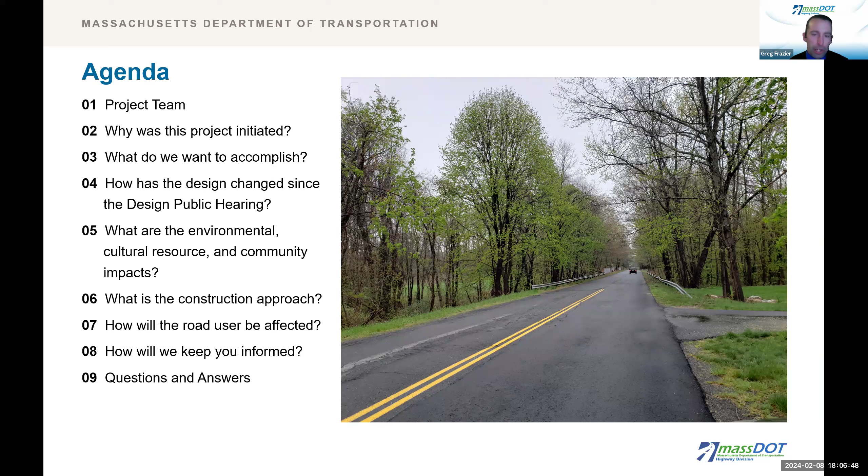Let me welcome our panelists from MassDOT who've joined me this evening. As mentioned previously, I am Greg Frazier, the MassDOT Project Manager. Mark Moore, District 1 Project Development Engineer. Pam Marquis, the Right-of-Way Compliance Manager. Joe Yu and Chris Clem, who will be our producers and facilitators for this evening. From the town of Williamsburg, Nick Kakimoff, the town administrator. And from Hoyle, Tanner and Associates, we have Todd Clark, the consultant's project manager, and Nicole Davis.

A handout has been prepared and posted to the MassDOT website. In the handout, you will find documentation which may be useful to you in understanding the project and submitting formal comments in response to this presentation.

The notice of meeting is included on page 2 of the handout. The notice was sent to your municipality on January 18th, 2024, and coordination will continue as the design progresses. This notice also appeared in the Daily Hampshire Gazette and the Country Journal on January 25th and February 1st of 2024. The meeting was also posted to MassDOT social media. Thank you as well to the town of Williamsburg, Williamsburg Veteran Services, the Food Bank of Western Mass, Registry of Motor Vehicles, and the Pioneer Valley Planning Commission for sharing the notice.

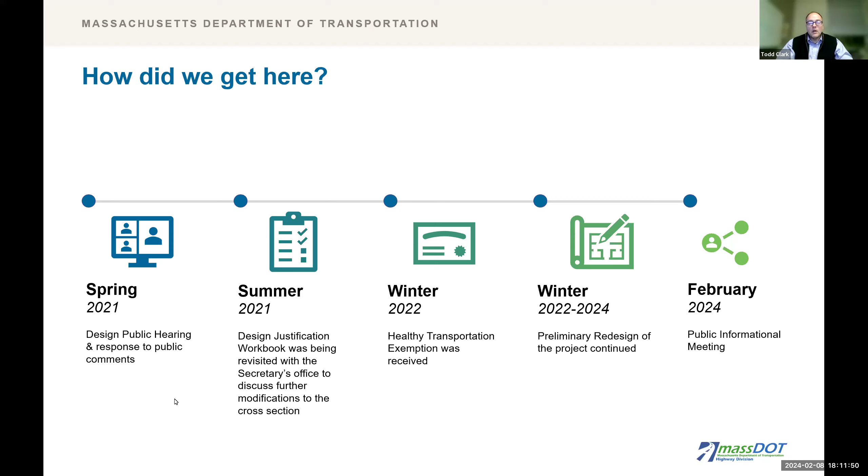Why was this project initiated? To achieve the 4 project goals: 1, maintain the rural character of the road, preserving the area; 2, address the poor roadway pavement condition; 3, update signage, pavement markings, and guardrail; and 4, repair and maintain roadway drainage.

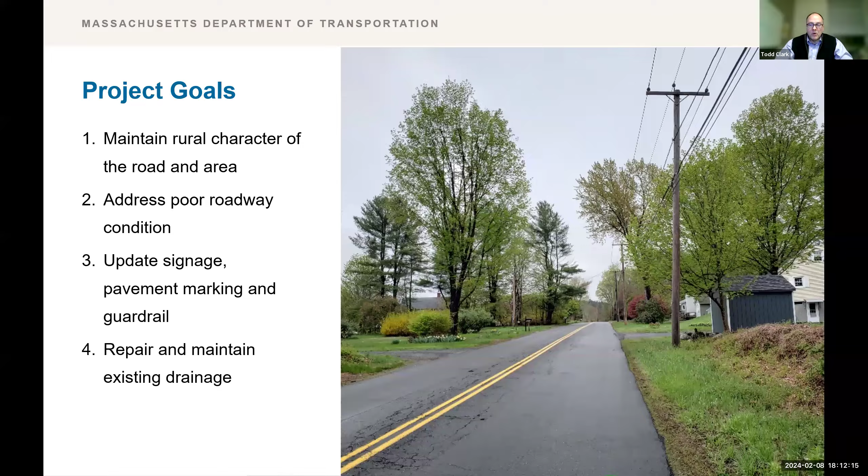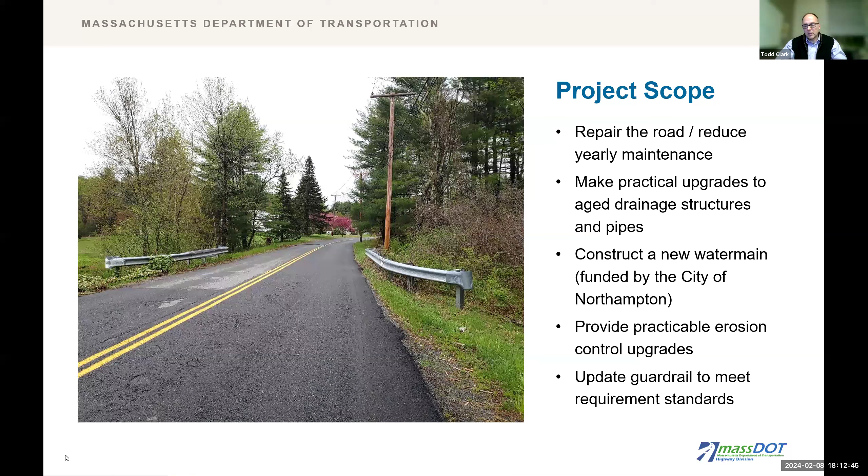What do we want to accomplish? Repair the roadway pavement and structure to reduce yearly maintenance efforts. To do so, this will include practical upgrades to aged drainage structures and pipes. Also included is installation of a new transmission water main funded by the City of Northampton. The project will address the need to provide practical, permanent erosion control measures and upgrade guardrail to current standards in this rural setting.

So how has the design changed since the public hearing? Leading up to the design public hearing, alternatives analyzed focused more on providing bicycle and pedestrian accommodations. At the hearing, the 28-foot paved cross-section was presented and strong comments were heard in opposition. This prompted the revisit to the design justification workbook and pursuit of the waiver of the healthy transportation policy. Upon receipt, the project is now road preservation focused, intending to maintain the rural road character, reduce impacts to abutting properties, and make repairs and updates where feasible.

The existing roadway is an unbuilt road with irregular pavement layout, width, and curvature. The roadway varies from 22 to 26 feet and is on average between 24 and 25 feet wide. After reviewing the existing conditions, designers iterated the proposed curvature to minimize deviations from the existing conditions. The design now proposes a consistent 24-foot wide improved paved surface with new markings, signage, and guardrails. By comparison, there are differences between the existing and proposed edges of pavement that will be further described in the coming slides.

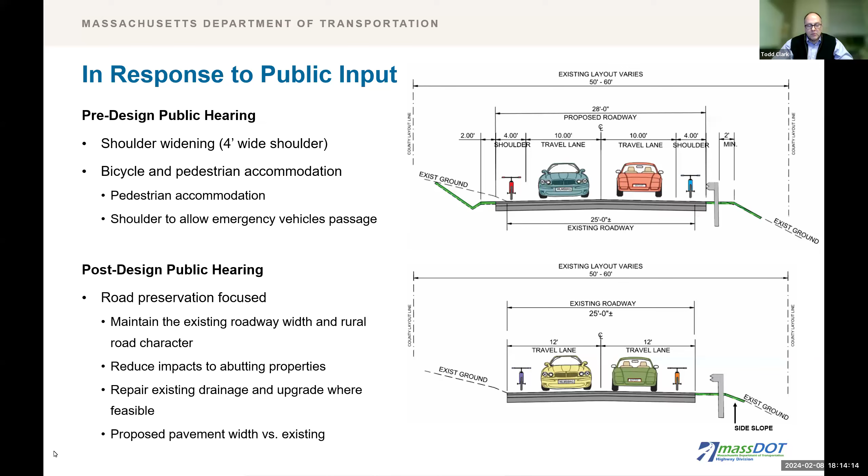Preserving the roadway. Next slide.

In addition to new pavement, the design also proposes repair and maintenance of new drainage pipe structures and culverts and ditches, as mentioned, to perpetuate the existing drainage patterns. Stormwater treatment measures such as outlet protection stone for erosion control are included to meet Wetlands Protection Act requirements to the extent practicable. One stream crossing improvement replaces a 48-inch corrugated metal pipe with a stream crossing rule compliant precast structure. The new 24-inch water main will be installed from the start of the project to and along Reservoir Road. With this design, overall, fewer utility pole relocations are necessary, as will be described in the coming slides.

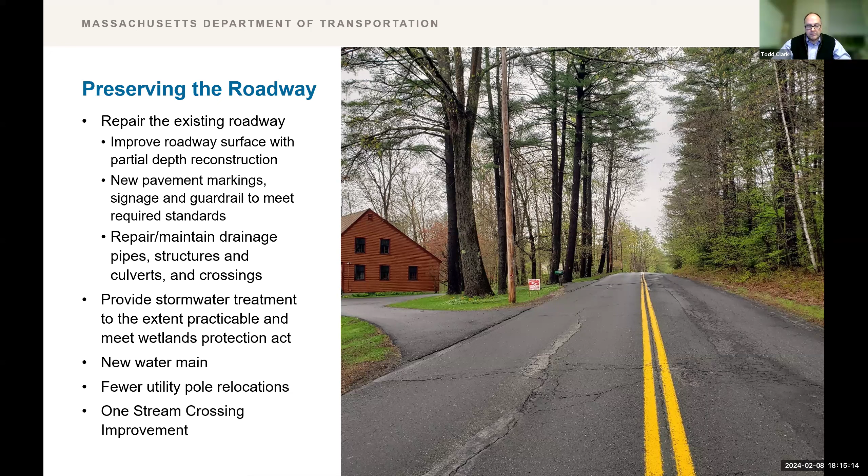Before we get into the slides, however, let's review some terminologies used during the presentation.

Driveway area is the minor regrading and surface work to the driveways to match into the proposed roadway. Temporary slope areas are called out - these are topsoil regrading areas for drainage and drive work to match the proposed roadway.

Utility easement - these are areas around existing utility poles, anchors, and drainage structures and pipes beyond the right-of-way to allow necessary future maintenance and repairs.

Roadway - new roadway pavement and base materials. The new water main described is a new 24-inch transmission water main by the City of Northampton. Drainage structure and pipe - these are new catch basins, manholes, and pipes to replace existing corrugated metal pipes and structures.

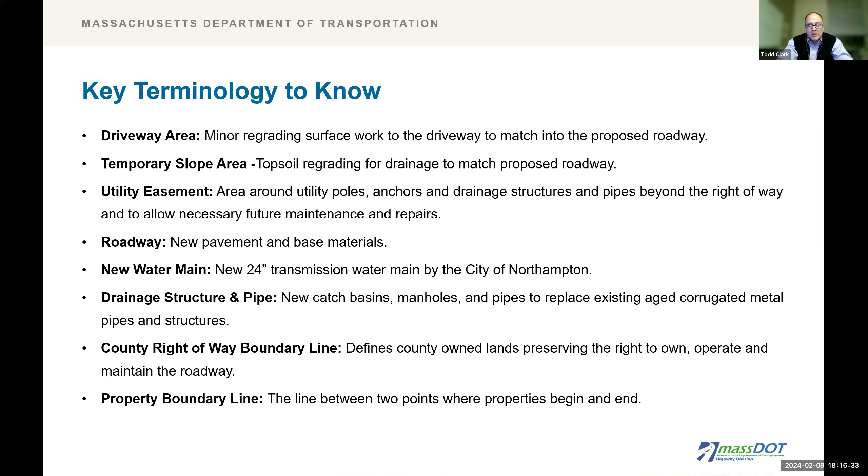Another term used is county right-of-way boundary line. This defines the county-owned lands, preserving the right to own, operate, and maintain the roadway. Property boundary line is a term used where defined as the line between two points where properties begin and end.

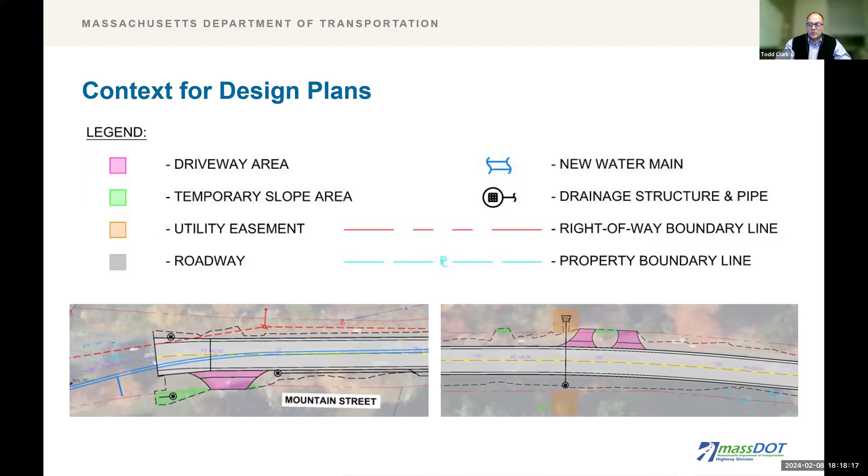Note the difference in the lower left graphic between the overhead utility lines and the boundary line. And finally, the property boundary lines are cyan colored with the text PL along the line.

Finally, before the presentation advances to describe the project design, allow me to again state the progress status of these plans. Driveway design matches are being advanced for the next submission, along with aerial utility relocations design. The utility pole relocations shown on the project graphics are not yet revised for the current design.

What is shown is what was shown at the design public hearing. Efforts are ongoing to revisit the need for relocations. Many relocations will no longer be required.

For example, the first utility pole on the left side of the road opposite the driveway located at 2 Mountain Street is beyond the work shown and more than 4 feet from the travel lane. So the need for relocation of this pole has changed and will be revisited.

This approach to revise all utility pole relocations along the entire project is part of the ongoing efforts in preparation of the 75% design submission.

Now on to the project description. The project begins north of the Kingsley Avenue, High Street, and Mountain Street intersection. The design plan graphics in the area of 2 to 8 Mountain Street depict proposed work on the pavement, drive areas, existing aged drainage structures and pipes being replaced, and the new water main along Mountain Street.

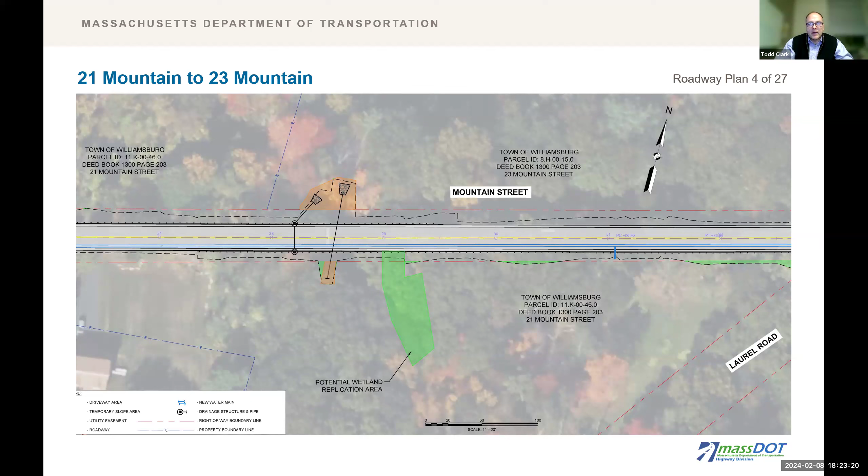Continuing down the road, from the Laurel Road intersection through the areas of 23 to 30A Mountain Street, it's more of the same type of work. Matches to existing driveways are shown, aerial utility relocations are being revisited, and there's temporary slope work shown in the Laurel Road intersection area.

Next slide, please. In the area for 29 Mountain to 35 Mountain, again more of the same roadway work, water main, and driveway matches, with 2 areas at the 33 and 35 AB Mountain Street area where roadway side slopes are shown beyond the right-of-way layout line.

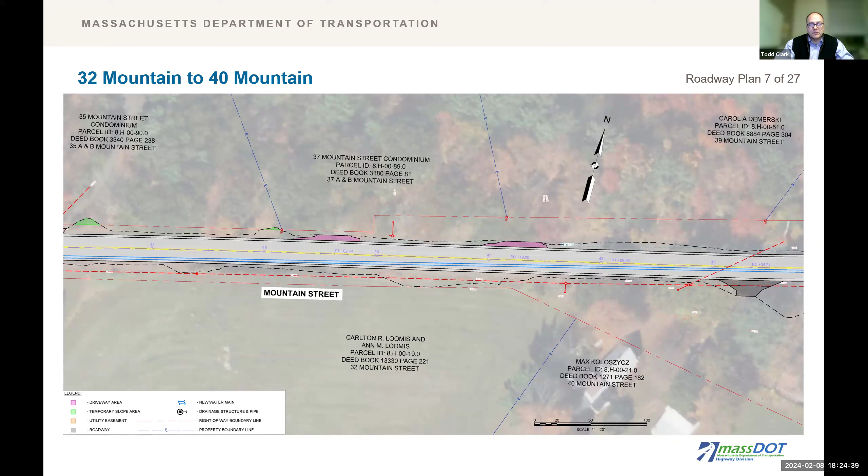For the area between 32 and 40 Mountain Street, again more of the same type of work: roadway reconstruction, water main with some side slope grading on the 35 AB parcel, and driveway matches.

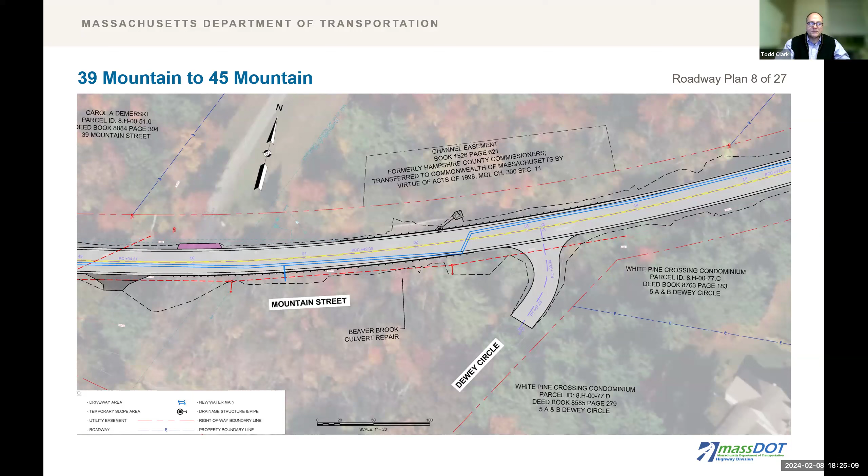Next slide, please. As we come into the Dewey Circle area, roadway work will continue along with the water main work, guardrail installation opposite Dewey Circle, some Dewey Circle roadway improvements, and associated grading.

Next slide, please. In this area of the project between 49 Mountain to 4 North Farms, the roadway work will continue with much of the same. New or replacement structures are shown adjacent to the 49 Mountain Street and 5 AB Dewey Circle parcels.

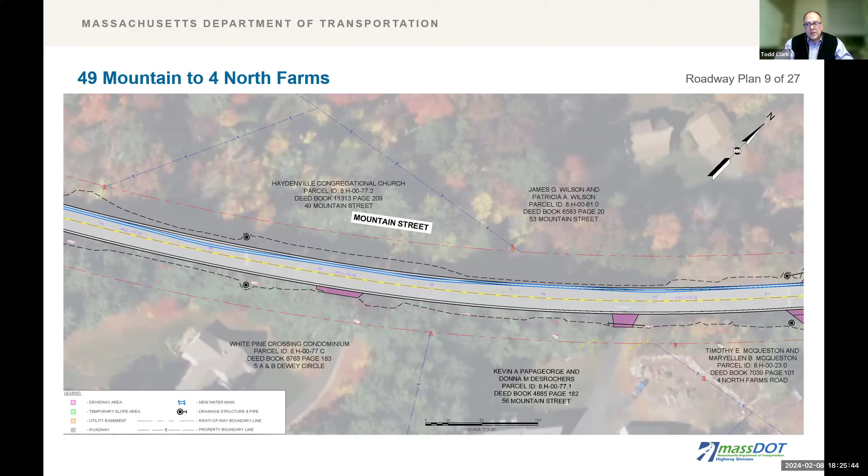Continuing on, for the area between 53 Mountain to 57 Mountain: driveway matches, replacements and enhancements of existing drainage structures. Noted on this is some slope work beyond the right-of-way in the slivers of light green shading, along with utility easements shown in orange highlights. Added to the end of existing pipes along the corridor are feasible erosion outlet stone to reduce the potential future possibility of soil migration.

Continuing past North Farms Road onto the area between 57 Mountain to 65 Mountain, more of the roadway work continues substantially within the right-of-way with driveway matches to existing conditions.

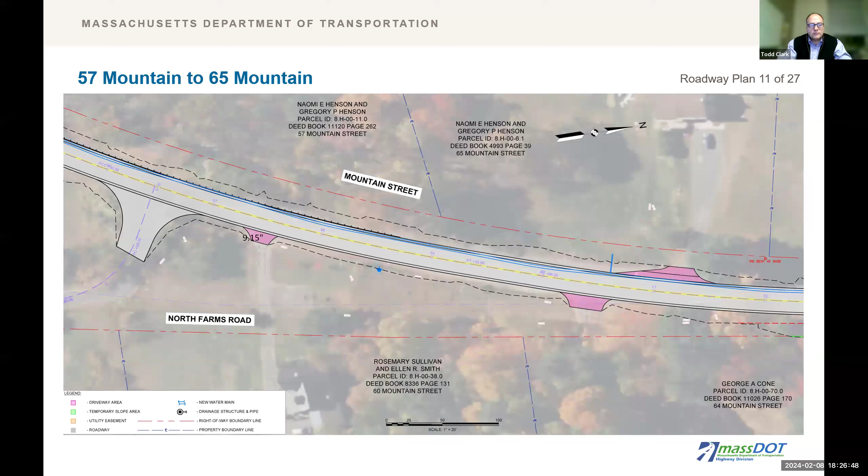64 to 70 Mountain Street. The roadway work will continue along with the water main reconstruction work. In this area there's existing drainage, closed drainage systems and structures intercepting stormwater. Those will be replaced, with the intent to replace the corrugated metal pipes that have reached their service life. The work is shown substantially within the right-of-way, and again, the utility easements shown on these plans are being revisited.

This is the area where some of the existing pavement deviates from the proposed. The reason for the deviation is that the existing pavement in a couple areas, as I'll describe moving down the project, is actually narrower than 24 feet, so the intent is to provide a consistent 24-foot proposed roadway through the area. But in this area from 70 to 78 Mountain, again roadway work, water main, and drainage structures and pipes.

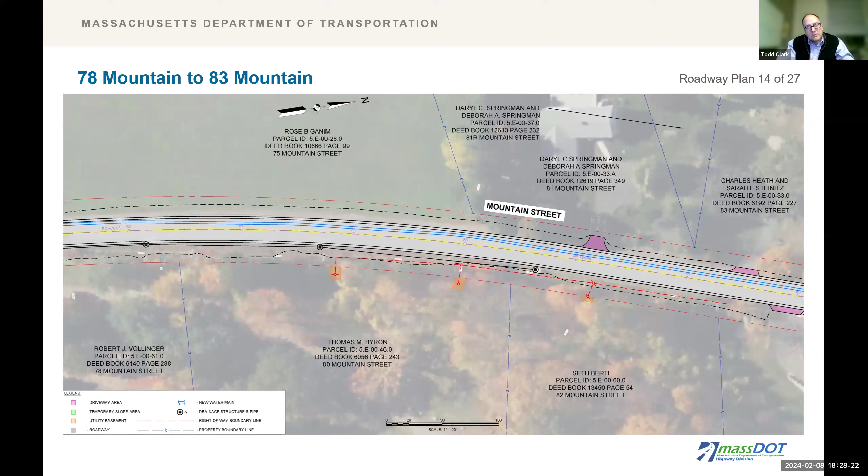Next slide. More of the same through this area. Continuing down the roadway with 81R to 90 Mountain, again more of the same approach in new design, where the slope work is substantially on this sheet within the existing right-of-way layout.

Next slide, please. From 89 to 94 Mountain Street, this is an area where the pavement continues to be narrower than the proposed 24 feet, but roadway work will continue. There is some slope work shown at the Emmerich and Poulin parcel on the lower section of the screen, also shown as a utility easement on that parcel for outlet protection stone for the existing pipe outlet. Additional slope work is shown on the 94 Mountain Street parcel.

Moving on to the area between 94 and 101 Mountain Street. Again, more of the same type of roadway work and driveway match work. This is the area that continues to be less than the 24-foot width, on average measured to be between 22.5 and 23 feet wide.

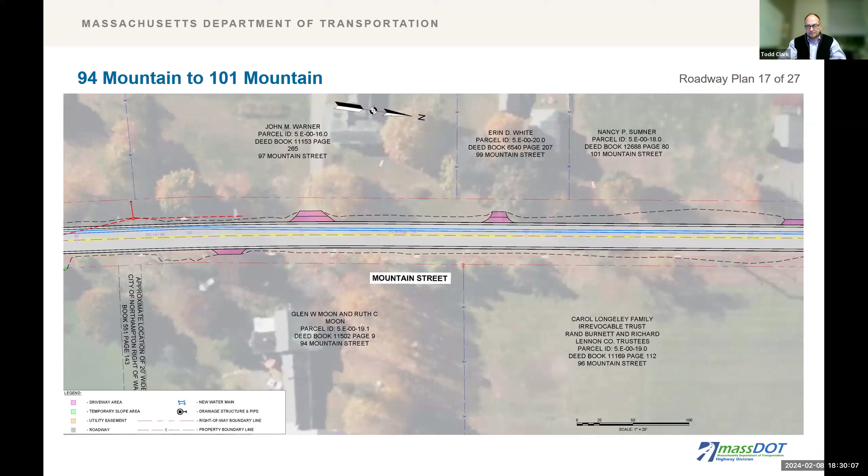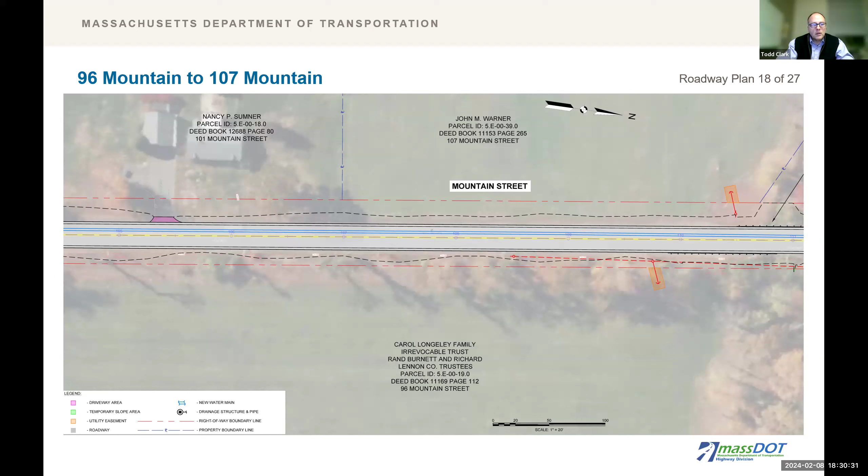Continuing on, for 96 Mountain to 107 Mountain Street, again more of the same type of roadway work and water transmission construction, with the beginnings of two guardrail segments shown. Continuing on to the area between 96 Mountain and 105 Adams.

This area depicts the proposed roadway work, pavement, and drive areas. The utility relocations here will also facilitate construction of a new stream crossing compliant precast structure mentioned earlier.

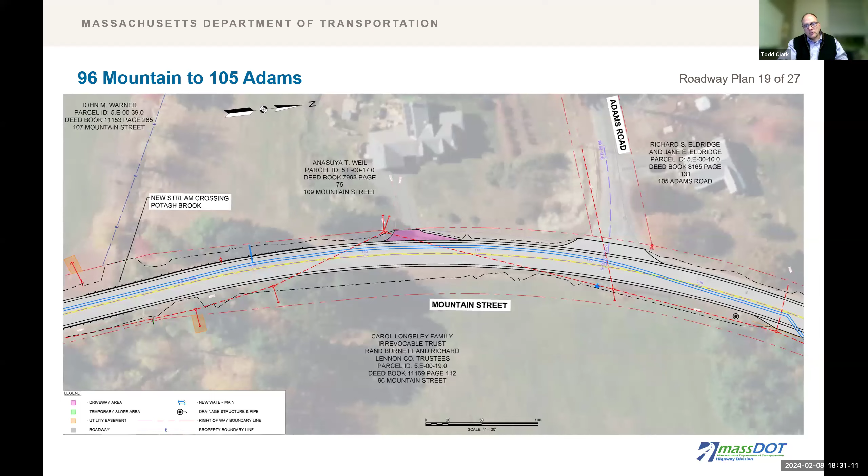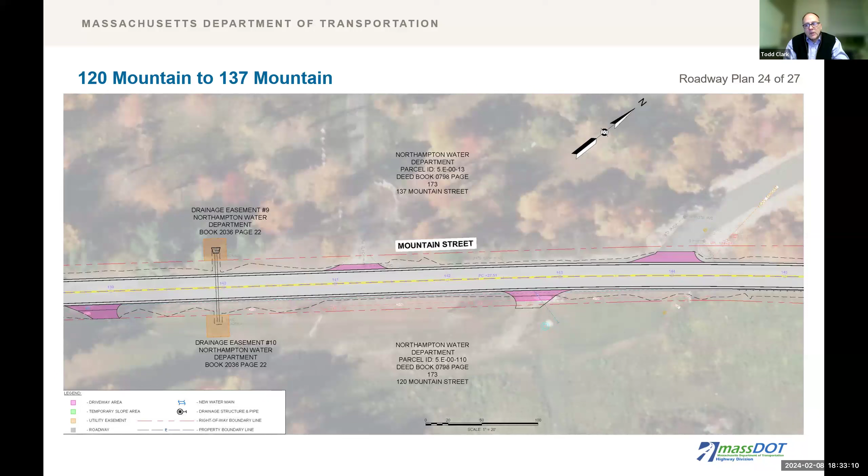Continuing on, 120 to 137, again same type of work. At the far right of this parcel is the driveway up to the water treatment facility.

Again more of the same type of work in this area. The guardrail is extended along the right-hand side and the roadway reconstruction work will continue.

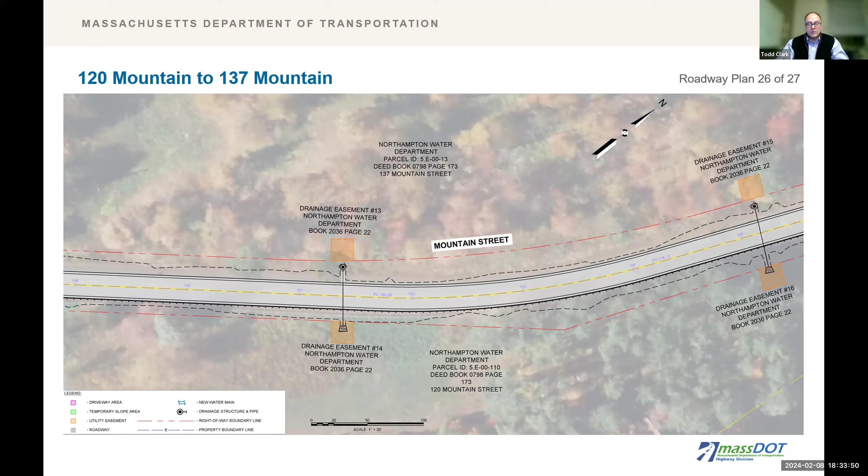Continuing on, this is the last project graphic for the project that ties into and just over the Whately town line. Again, the consistent 24-foot wide roadway section will tie into the existing as shown in this graphic.

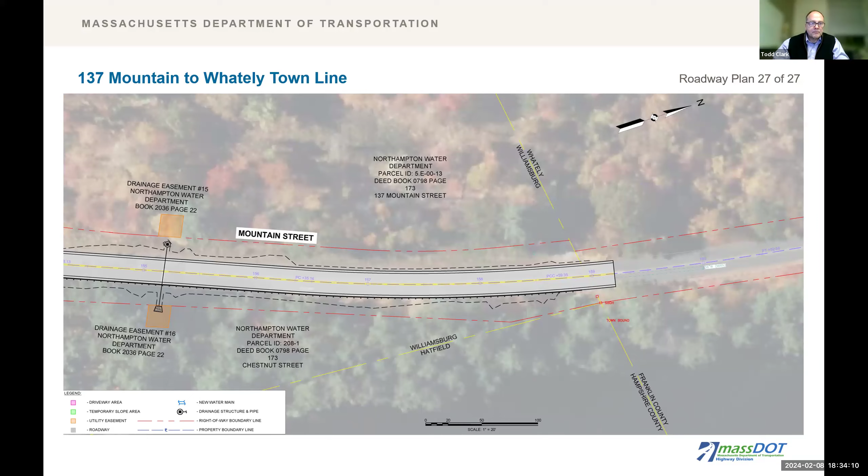Next slide, please. So what are the environmental, cultural, resource, and community impacts?

A notice of intent, or NOI permit, for wetlands impacts will need to be filed and coordinated with the Williamsburg Conservation Commission. This will include coordination with Mass Wildlife's Natural Heritage and Endangered Species Program, occurring prior to the NOI submittal, to determine the species protected under priority habitat associated with Beaver Brook.

Permanent wetland impacts will be replicated within the new area mentioned previously. The project avoids the high-value agricultural land uses beyond the rural village district. Each submission will be reviewed by Mass DOT's Cultural Resource Department, including a historical review. The project avoids impacts to Article 97 lands, and no Section 4F land is located within the project limits.

Could you go back for one moment, please? I would like to mention some wetland resource impacts that are being kept to a minimum. There are two large culverts on the project that cross the Beaver and Potash Brooks, and the improvements within this project are limited to culvert repairs to retain the existing function. I've mentioned the one stream crossing enhancement already, and there are no impacts to the Mountain Street Reservoir.

Moving on. What is the construction approach? During the project construction, two-way alternating traffic during roadway drainage, guardrail, and utility work is envisioned. Staged construction

is envisioned for the culvert work for the new precast stream crossing. This includes a temporary signal with alternating traffic. Access will be maintained to all abutting properties at all times. The work is intended to be constructed within the area of the existing road, and the roadway is anticipated to be constructed in segments.

Local areas for drainage, guardrail, and utility work will constrict travel to one-lane operations during the day. Water main construction is expected to start at the beginning of the project and progress towards and along Reservoir Road. Expect traffic restrictions to one lane around daily construction operations. Again, short-term single-lane operations are proposed around the culvert near the 96 and 107 Mountain Street parcels for the stream crossing.

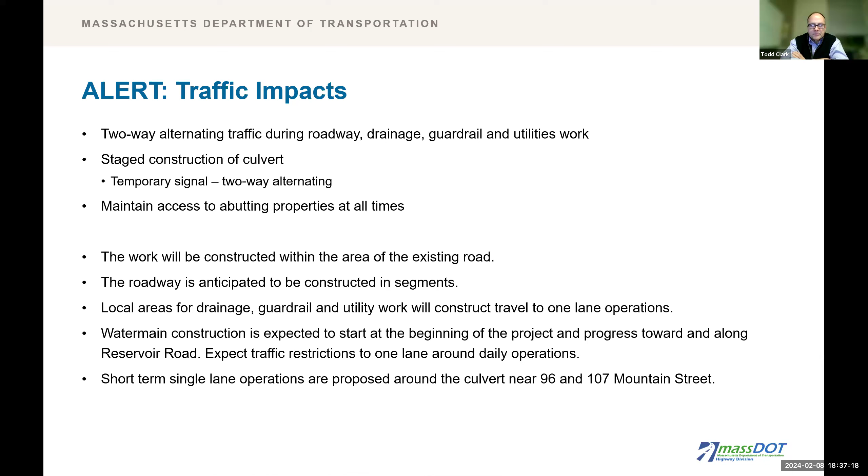Next slide, please. How will road users be affected?

Users will experience daily lane closures opened during non-work hours. Possibly multiple locations within the construction zone will be necked down to a single lane. A temporary signal will be installed to control the alternating one-way traffic pattern around the 96 to 107 Mountain Street culvert construction site. Travel can be expected on irregular surfaces, temporary trench patches, and gravel segments as well. Property access, however, will be maintained.

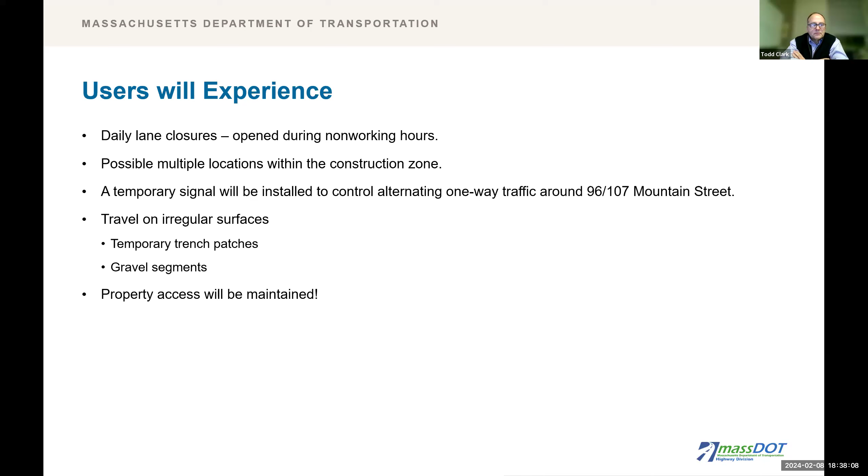And now I'd like to turn the presentation over to MassDOT's project manager, Greg Frazier. Thank you, Todd. So how will we keep you informed moving forward?

Upcoming public outreach will involve a 75% submission, multiple 75% right-of-way submission reviews, a 100% submission review, and a 100% right-of-way submission review, all of which will be submitted to the town of Williamsburg. There will then be a final submission for advertisement for bids.

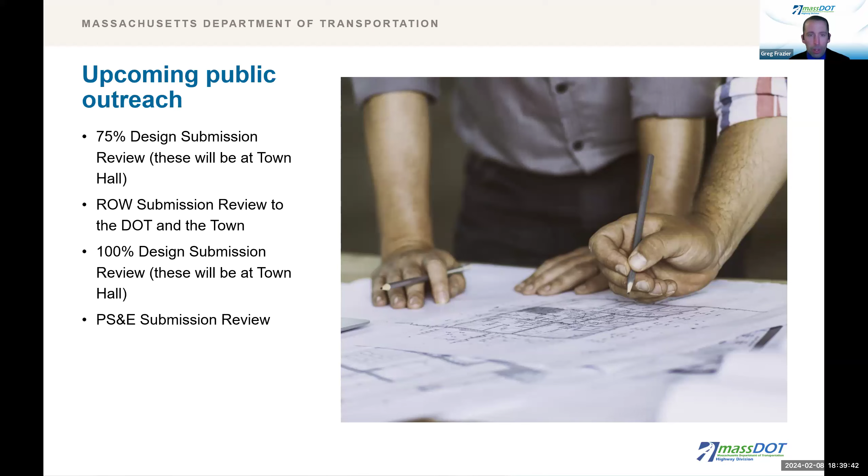If you have any questions or comments which you would like to submit in writing, you may use this sheet for that purpose. You may email or mail it to the department within 10 days of this date, and it will become part of the official record.

For mail-in correspondence, address it to Carrie Lavallee, PE, Deputy Administrator and Chief Engineer at MassDOT, Ten Park Plaza, Boston, Mass, 02116, attention Project Management, project file number 607231. To email questions, comments, or concerns, please email MassDOT Project Management at dot.state.ma.us.

Please include a subject line of attention design public hearing webinar comments, project file number 607231.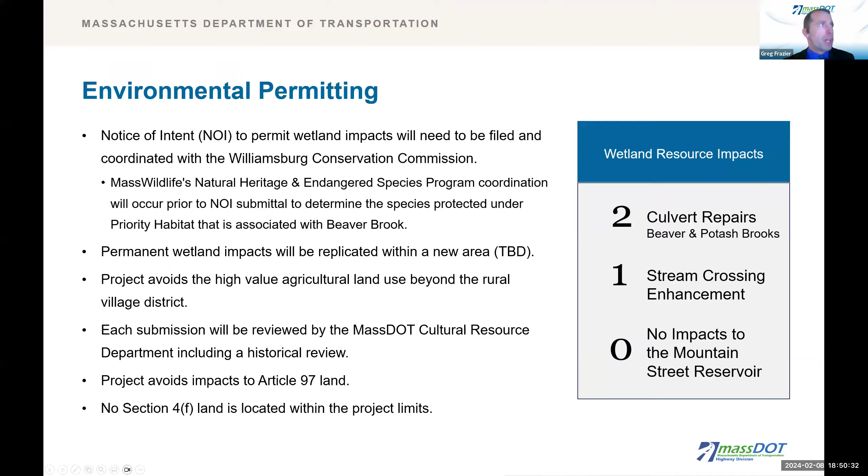I'll let Todd confirm, but where the cross section is reduced to match the existing roadway, those stone walls should not be impacted. Joe, could you confirm, 64 to 68? Yeah, it does not look like we'd be impacting it. Todd, as the other designer, can you confirm? Sure, Greg, I was doing the same, zooming into 64 to 68. Is that correct? I'm gonna say yes, I agree with you, Greg, but we can always delve into it in more detail and get a more formal response back to confirm. Thank you.

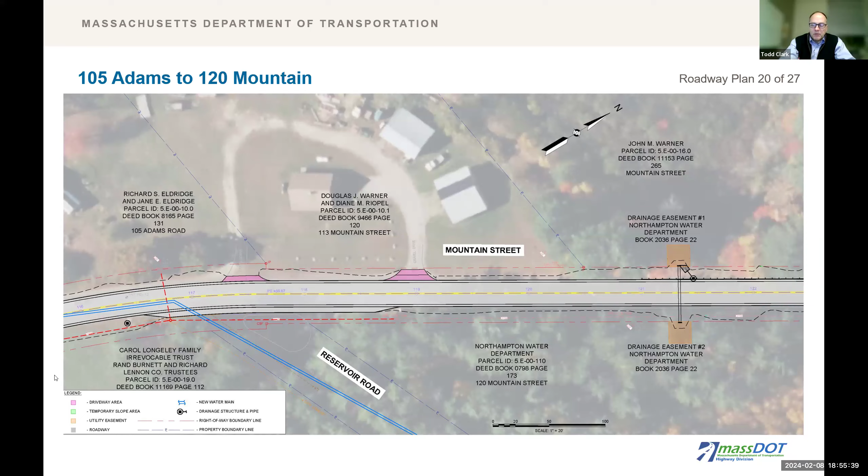So Todd has been mostly dealing with the design of the water main with the city of Northampton. Todd, can you give a brief on where it's starting and ending, just so the residents are aware? Sure. So right now, the water main is continuing down Reservoir Road and does begin at the project limit, where it's intended to be capped. With this project, there is no future project planned right now, as I'm aware, to continue down Mountain Street.

The value of the water main work within the 607231 project is that it does make an interconnection to a cross-country water main along the Mountain Street segment, and that it takes offline a very, very old segment of water main that runs cross-country. So that's the value in doing so. And I believe the town's intention, and I can't speak for them, but my understanding is that they simply want to propose this water main while this work is being done so that they would not impact the roadway in the future.

So thanks, Todd. Just to clarify, though, it's only going to the project limit on Mountain Street. You're not extending it beyond that. Correct. I see the confusion, and it's a really good question. Yes, we should have caught that with this graphic. It's going to be capped within the gray roadway area. Thank you for the clarification, Greg. You're welcome. And Todd, good question.

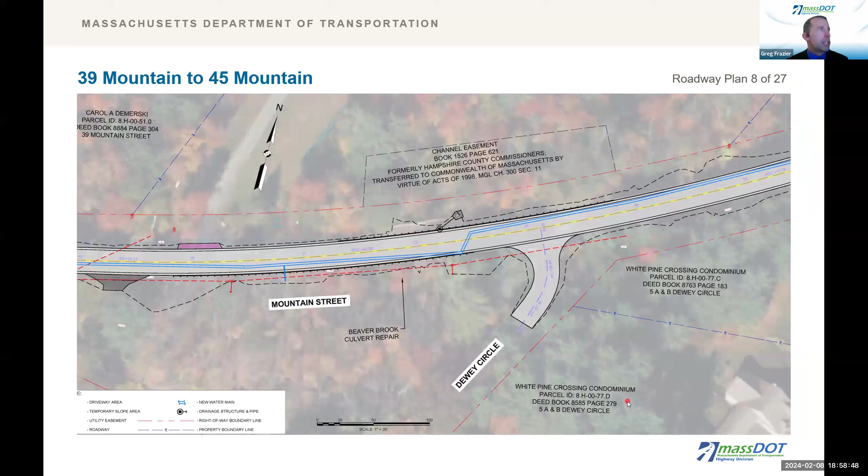So Delia, if you want to use the handout, or we'll put back up how to contact us, even the email address. And if you want to provide your contact information, we can certainly have it corrected on the plans if it doesn't match. We can also, if you email, give you a copy of a draft plan as it stands right now. Again, the plans are very preliminary at this point. Your town hall is also going to constantly get, at every submission -- the 75%, 100%, and right-of-way submissions -- a hard copy sent to them. So it's probably the best way to see any updates is just by contacting your town hall or stopping by to take a look at the plans.

Thanks, Greg, and thanks, Delia, for the questions. Question from David Brooks: what is the purpose of the wetland replication? Why is it so large? Where are the wetlands being filled in?

So again, the plans are very preliminary because we were really focusing on how to get this cross section down to match the existing with the new standards of super elevations and runoff. But I'll let Todd speak to the replication area. I know we still have some work to do on that, but Todd, if you can give some insight. Sure, certainly. Thank you, Greg.

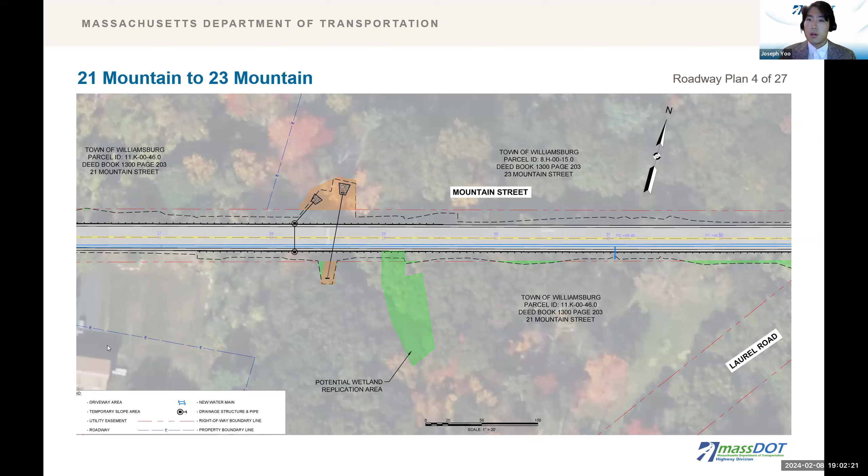We have a question from Joel K. Sorry to be late in arriving. No worries. Can you go back to 8 Mountain Street, of course? Joe, it will probably be the first of these slides. Oh, my bad, I'm sorry. Thank you. Yep, bottom right. Oh, yes. So 8 Mountain Street. Be right here.

While we wait for any additional questions and comments from our attendees tonight, I'd like to go back to the slide that gives you, the audience, two main ways to contact the Department of Transportation after tonight's public meeting. The first and preferred way is sending an email to the Mass DOT Project Management email, with domain at dot.state.ma.us. I understand it's a very long domain, we didn't get to decide it, but that's what we got. So please send us an email. Additionally, if you'd like to do it the old-fashioned way, you can send us written mail. Please address it to Carrie Lavallee, PE, the Chief Engineer, at Mass DOT's Highway Headquarters at 10 Park Plaza in Boston, zip code 02116. For both correspondence methods, please submit the correspondence with the project management title addressed with the project file number being 607231.

Two main ways for you to contact us, the Department of Transportation, after tonight's meeting: email is preferred, but you can also write physical mail to our Boston office at 10 Park Plaza. Please include the project file number in both email and mail correspondence. You can also use a mobile device or follow the website link on the second bullet to reach the Highway Division events at mass.gov, where you can see all of our meeting recordings, handouts, and additional presentation material, such as the flyer and the notice. This is a great opportunity for people to get involved with the project and ask any questions even after tonight's meeting.